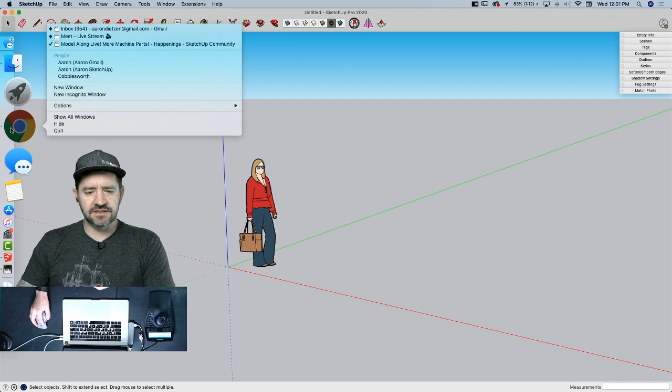We're going to get together today, and two weeks ago we did some modeling of some machine parts. I found some drafting examples online and was requested that we do that again. Last Wednesday we talked about my top 10 utilitarian extensions, a good set for everybody, and that was fun. Today though we're going back to more modeling, kind of a model-along. We're going to go nice and slow, model something step by step, and you guys can model with us. So I've posted up here on the forum six images - I don't know that we'll get to all six, but I found these six images, downloaded them, and we'll use them as parts to model in SketchUp.

So we'll start with this one right here. I believe I called it part A, if you guys did download it.

It's funny because we hang out so often, I feel like I don't ever have as many good stories queued up like I do when we just talk on Friday. Like, what's some good stuff that happened since the day before yesterday? Well, I got ready for this two days ago.

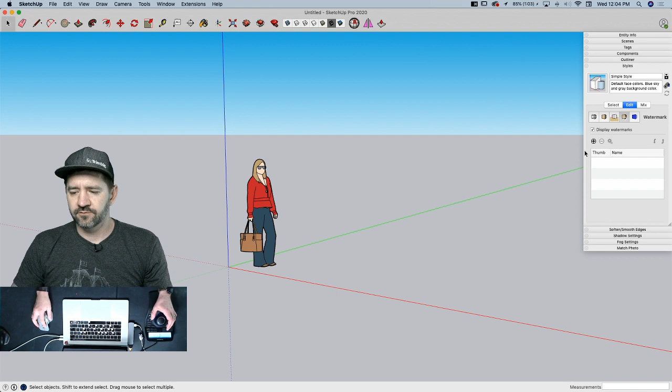I'm gonna go find that first part A, open it. All right, it's gonna bring in all big. I'll actually label this as part A. I want it to be in the background, not over top. Next, full image, you don't need it to be translucent or anything. And I'm gonna position it as I like to do in the upper left corner, and we'll make it small enough that it doesn't get covered up too much by my head. That's pretty good. That looks good. You guys can see that. I can see that. That's the important stuff.

All right, so with that, now we have that image back there. So see, as I move Laura around, any of my stuff is going to be over top of it, and it doesn't move. I don't have to worry about it getting in the way. Second thing I'm going to do is come up to my model info and modify my modeling units. My default template that I generally use is an architectural template, so it's in fractional inches. In this case, though, I want to model everything in even meters. So this is, I assume, millimeters, but to avoid any issues with small faces in SketchUp, I'm going to model everything at meters. So I'm going to come in here, change to decimal

and meters. You change your precision? Yeah, I can change this to smaller. Maybe we'll go, actually everything should be rounded, but we may have some that are like a half meter, so I'll go to 1 decimal point. All right, that looks good. With that, we can start running. All right, like I said, I do have a bunch of these up here, 6 of them, so I'm just gonna hop in and start modeling.

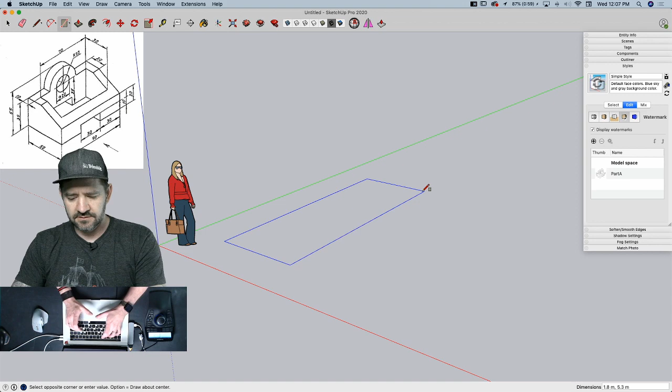So I'm going to start with this 50 by 90 rectangle. So I'm just going to come in here, put in a rectangle that is 50, comma 90. And it's going to be huge. It's going to be big. I'm going to take Laura out of there so I can pretend it's small. I'm going to take that. The sides of this seem to be 10 all the way around. So I'm going to offset this 10, enter, and get rid of this shape. And I'm going to pull it up the full height of 35. That's this shelf right here. So I'm just going to push pull, 35, right, like that.

Now, this little hoopy thing is going to be the last part. I know that's the technical machining name, hoopy part, in case you guys aren't up to date on how all that stuff works. But in a machinist shop, this would be called a hoopy part. That's a lie.

All right, but first I'm going to finish off my block here. So I'm going to start with this right here. I want to get this angle, this cut down. So it has 20 flat, and then it goes to 20 up. This isn't a square, so it's not a 45-degree angle. I don't really care what the angle is. What I'm going to do is just come over here 20. That's going to give me a snap point right at 20. I'm going to do the same thing down here at the bottom and come up 20. And then just draw a line between those 2 points, here to here. Now what I can do is I can just grab that, push it across like that, push that across to here.

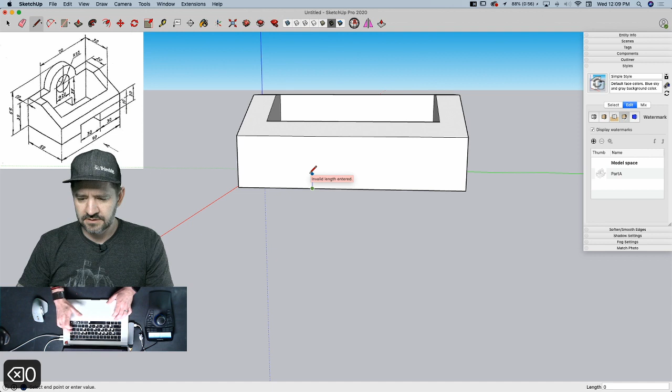The second thing is these little steps right here. Right down here I have a 30 by 10 cutout. So I'm going to start at one end, come across 30, then I'm going to go from that point, there it is, up 10, whoops, up 10, oh, up 10, there we go, third try's a charm, back over 30, and then back down 10.

Now to save myself from having to do that again, I'm going to grab this rectangle right now, grab it from the middle, option copy to the middle of this back wall right here. Now I'll just push both of these through to the back side, there we go. Now I got those cuts.

Did you double click on your second push pull? Yes, I double clicked on my second push pull, which push pulls the exact same amount as last time. So since this one's through 10, this one's through 10, it's the same.

All right, now what we got is our hoopy part. This is the warm-up. This is the easy one. So the center of this circle is up 35 off the bottom. I know that this is 10, so that means it's 25 up from the middle here. So I'm just going to draw a line, 25. Oh, look at that. Look where 25 happens to be. Well, I don't need that line at all then. I can just use the center point of that line. So I'll start right here.

And let's see, we have two circles. One with a radius of 20, one with a diameter of 20. For these models, I'm going to use circles with 48 sides. Just gives me a little bit more clean lines. Not a requirement, but I'm going to do it for mine. So I'm going to do my first circle of 20 radius. That's the bigger circle. Go back to the midpoint and do one at 10.

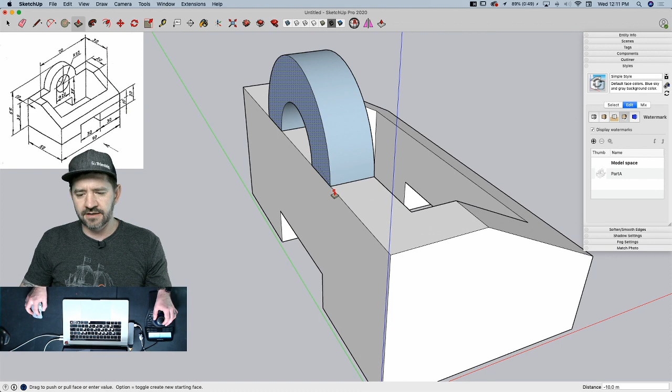And now I can get rid of this line right here. I don't want to get rid of this line yet. First, I want to take this piece, pull it back like this, and see what happened there? Because this was already aligning, it got confused and flipped my inside-outside. Somebody asked about that, and I had to kind of make up an example of what it was. Sometimes you get lucky and you get to make your own problems.

So what I'm going to do instead is, as I start to pull through here, if I hit the modifier key, Option on Mac, Control on Windows, it'll create a brand new surface. So it doesn't have any backsides there. And I can click that to there.

I have to say, in SketchUp, it turns out I'm usually very lucky. All right, that's good to hear. I make my own problems a lot.

So I have this bottom. Right now this doesn't go through, so I'm just going to push pull it through there. There we go. The last thing is modifier key with the eraser to get rid of those pieces. And that finishes our piece.

Under 10 minutes. You should be a machinist. Apparently. I don't know, it probably takes longer to make this out of metal than it does to draw it in SketchUp.

It doesn't quite look the same though, does it? The material looks bigger here or something. Let me try this. Let's go to parallel projection. Go line this thing up over here. Looks pretty good to me. Yeah, I guess so. You might need to change your field of view. Yeah. There we go. Yeah, I guess that is pretty good. Whoever hand drew this was fairly precise.

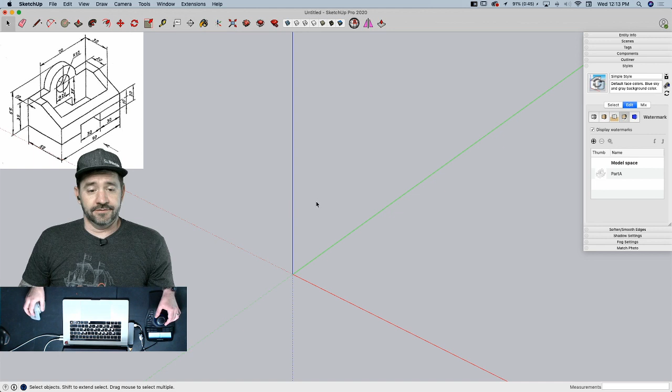I don't know. Oh, Christopher Morin said he did it. Anyone else? Thumbs up, they followed along and got it. Nice. Whoa, Boris is having a glass of wine. I'm assuming it's not noon there. Well, I mean, if it is, hey, no judgment. You do it. Unprecedented times. They're saying it on the news still every 5 minutes. Do what you need to do. Drink wine.

All right, I'm gonna come over here to my watermarks again. So what I could do is I could come here, grab my part B, and open that as a new watermark.

Let's say it's a background image, full image, positioned in the upper left, small enough that it fits behind me. Well, this is going to be exciting. MCAD already tried this, and he stumbled on, I think, the one you're about to do. All right, let's see. I'm ready. Let's do it.

By putting it over top, see that? So now I still have A under there. So if I ever wanted to, I could reorder these and flip through my different parts. I don't know if that has any practical use, but they're in there. That way I don't have to reload them later. You can't hide thumbnail images, so I can't have them loaded and not visible, but I can stack them up like sheets of paper so that I only see the one on top. So that may be something worth doing. I don't know, it's your call.

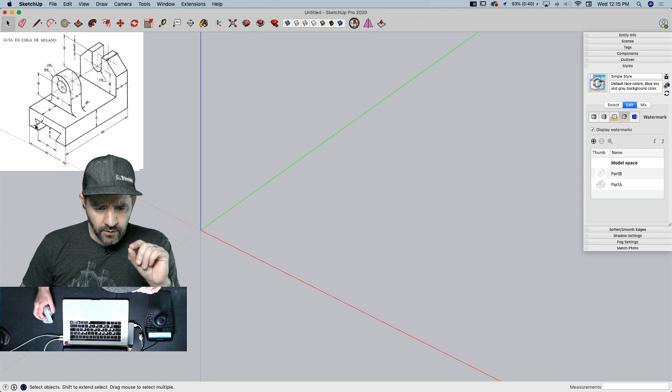So what we have is basically a rectangle where normally last time I started with a rectangle on the ground and brought it up. What I'm inclined to do this time is get this shape first and then pull it this 150 and then build these two pieces up on top. So to do that, I'm going to start with the rectangle here that is 60. And that comes up 25. So there we go. That's this rectangle at the end.

Now, I'm going to draw a couple lines here. So this middle line is 30. Oh, you know what? I can go back to perspective view. There we go. So that means I'm going to come in 15 and draw a line down. Go this way 15, and I'm going to draw a line down. And then I'm going to come here and go up 14 and draw a line across. Now,

what we have right here is a 60-degree angle. See that? It's saying that this comes down 60 degrees. So if one were so inclined and able to do it, they could probably do some math in their head to figure, okay, if this is 60 degrees, what is the angle from here going up? And they could do the math to figure where that is. I am not that someone.

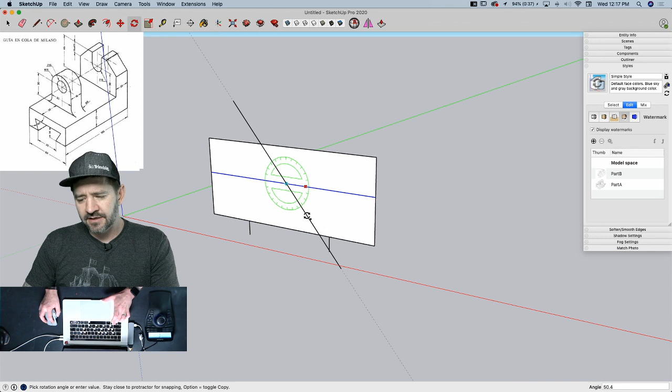What I'm going to do is take this line right here, go to rotate, and grab it from the middle. I'm going to press Option to copy it and rotate it to 60 degrees. And get rid of these pieces above and below, and I can take this line right here and move it to there, to get this one on the other side.

Ilgi is asking why you're not using guidelines. Here's your rant. You can rant right now. Because I don't. I've simplified my rant. Wow, that was fast. No, guidelines are awesome. A lot of people use them. A lot of people really like them. I've just never really gotten into using guidelines. I create the geometry I need and move it where I would need to move it. That's just kind of how I do it. But guidelines are great. That would be one way to do it. Hey, let's look at different ways to do this.

Hey, you know what I haven't done yet? Starts with S and rhymes with save. Pave? Dang it. Pave. I should probably save this. Let's go save this.

Okay, so if I wanted to do that with a reference line, totally could do that. I could come in here and use the protractor tool. I have to go look for it because I'm not even sure where it is. All right, I'm going to go to the midpoint here, and then I'm going to go again to 60 degrees. And then what I could do is grab a line and draw my line right here, inference this line, and then come off.

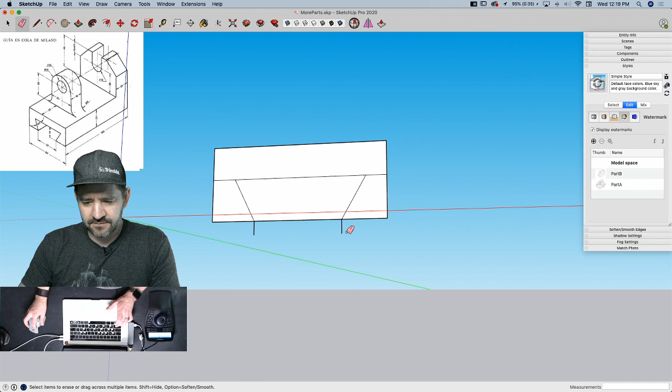All right, now I'll get rid of my extra lines. There we go. So now I have just my piece down there, and now I can push-pull that, my 105. And I have the base right there. All right, two more pieces. Yeah, I don't know what that thing is. I'm going to come draw this one right here, 20. So I'm just going to grab this line and copy it, 20.

What happened there? Something's funny. All right, I'm going to come this way, 20. And then I'm going to push that up 45. All right, now, what does this say? That's a good question. 15 times 45?

So is it moving up 15 units, and it's a 45-degree angle? Is that it, or is it a 15-degree line at 45 degrees? What the hell's a 15-degree line? Sorry. Well, I'm not 100% sure. Well, let me do two things. We'll see. Alexander's asking why I'm drawing in meters rather than millimeters. Okay, so it is a 15 millimeter line at 45 degrees.

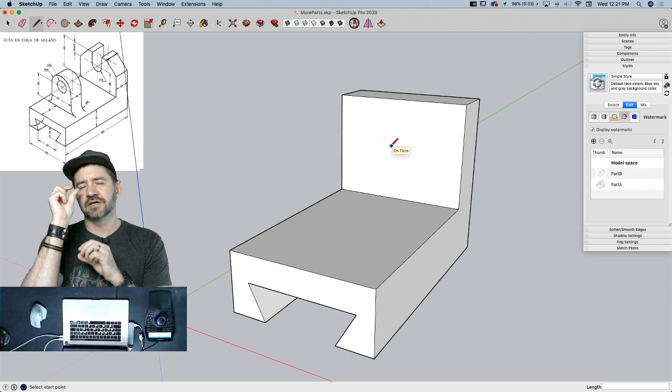Alexander, yeah. I'm drawing in meters because SketchUp is not made to handle sub-millimeter surfaces; it has a hard time drawing or creating those. So I'm drawing in meters instead, so I don't have a problem or an issue with those small faces.

So that's the answer. All right, so here you can see that there is a 30 unit, 30 millimeter, 30 whatever, going up to the center of that circle, which also lines up at the bottom edge of that angle. So since it's all 45, you can deduce that the last part is 15. I'm sorry, that's math. I'm mathing that part. I'll shut up. Okay, so here's the two things that I was thinking.

One is it's down 15, right? And then I'll draw a line like that. And I can take that, and I could rotate that 45 degrees. That would be an option. Likewise, I could also say 45, 45, and connect the two.

If it was a 15-meter line at 45 degrees, what I could do is draw a line that was 15. I could take that line, rotate it 45 degrees, move it against one edge, and then move it by the top up to the top edge. So I could do that. Either of those would be right. But I think, like Jody's saying, when I do that and look at the image, this looks right.

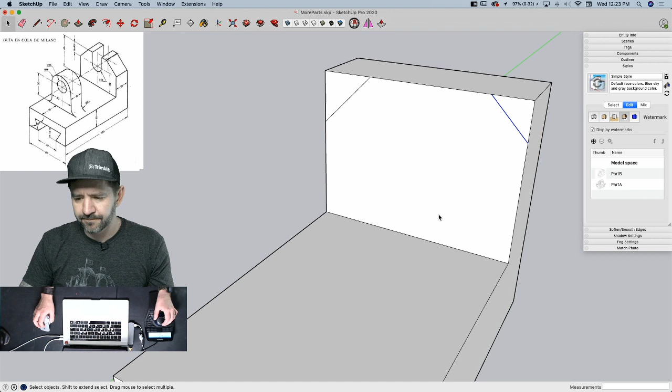You can see a line that goes across the bottom edge, goes all the way across, and then there's a 30. It's kind of written on the inside of the dimensions. You know that the bottom of that angle is 30 up. Right. Yeah, it's 30 up. So let's start here. Let's go to the middle, and we're going to come up 30. Grab a circle.

Radius of 15. What's the diameter of that? Nope. No. It doesn't say. Now I got to go look at the picture. No, I think it's a diameter of 15. So 7.5. Okay. That's light math, guys. That doesn't count, by the way, as being math, dividing by 2.

So then I'm going to go straight across. So see, I'm staying on the red axis till it hits the circle. That's important because I want to make sure that I stay on axis with that. Also, whenever I draw a circle, I'm always snapping out to the red, blue, or green axes, always keeping one of the edges on axes.

Since I have 48 sides, that means it's going to put 12 sides between the axes. So as long as I always stay that way, then I know I have snap points at any of those corners straight across the axes from the center. All right, so having done all of this, I can get rid of this. I can pull this back like this. And now if I look at my two options here, yeah, I'd say this is probably what it was.

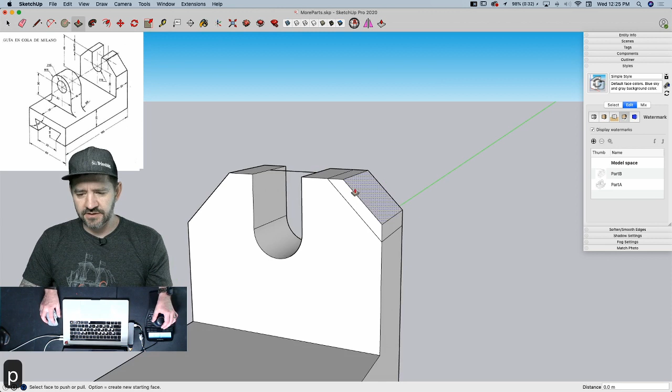So here's what I'm going to do. This will be fun. I'm going to draw a line right across the middle here, this piece. Grab this surface, go to rotate, go in the middle, option, swing that around 180 degrees. And then that material, that merges right there, so I can just push, pull, and cut that off. Bing. All right, I'm going to modifier erase there.

Okay, I'd say we're doing pretty good. Looking all right. Now I got one more thing up here. It's got a hoopy part on it.

Hey, Dave, welcome back. Isn't a hoopy like a kind of a car, like a janky old car? I'm sure. That's a hoopty. Yeah, hoopties have hoopies. Okay.

All right, so I'm going to come back 25.

I should stop drinking wine for these. Hey, you're an employee. You can't say things like that. I'm just kidding. All right. It's now on my official record. That's right. It's been recorded.

I'm going to draw a line from here. I'm going to go up 30. All right, now I got two circles. I'm going to draw them constrained to green using the arrow key. I'm going to hit the left arrow key to constrain to the green axes and pull down. Just like I was saying before, I want to stay on axis, so I'm going to pull down vertically 7.5. And then again, pull down on the vertical 15. That gets me this inside and outside circle.

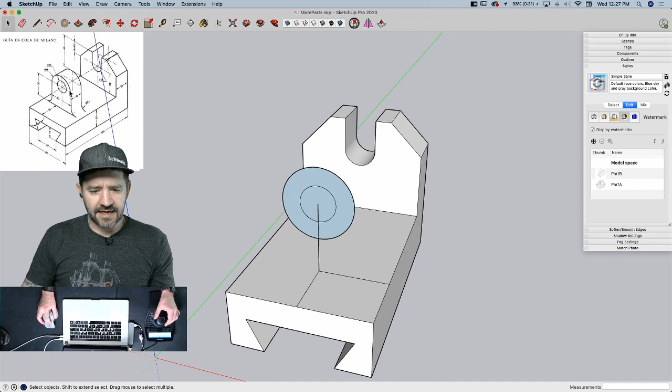Again, I can come straight across like this. That gives me the vertical. I'm going to drop that all the way down to the surface. Come across here. I'm realizing at this point this is a symmetrical piece, so I could have modeled half of it, but with all the circles and stuff, I don't know that I'm saving a whole lot of time on modeling half and then copying it over. I guess if you're counting clicks, then I'm spending extra time, but wait. All right, so... No judgment.

This is 30 wide, and now I have here a little arc with a radius of 6. So I'm going to draw a line up 6, and then take an arc from that point. Same thing here. 6, and now I can put an arc between this point and this point. Again, to save time, I'll just grab this one, go to rotate, because I have this middle point right here. Rotate from here, bring it around the other side, click.

Now I can erase this, and this, and I can pull that, looks like 15, enter. All right, and then I have a little bit of softening to do, so modifier key with my erase. Oops, it didn't merge right here, so I'm going to draw a line right here. There we go. Now it merged in.

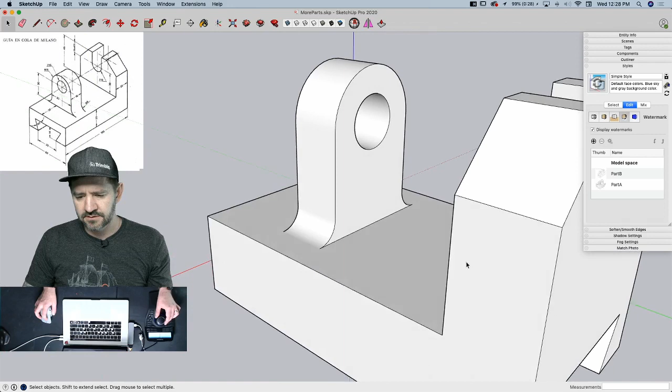Perfect. Manos is asking to show again how you move the direction of the circle. Arrow key. So when you come into, I had a line like this when I go to my circle, and I hovered over a point. The arrow key will let you constrain. So before you click, I haven't clicked on the point yet. I'm just hovering my mouse around. I can hit the arrow keys to switch which axes I want to draw on.

All right, time to save again. Let's save.

Are you doing the sip and save? It was pointed out earlier, I forgot who said it, you're supposed to be drinking water too. Stay hydrated. And I got a cup that doesn't disappear. It doesn't blend in with the green screen like the last one. That was just a little too crazy.

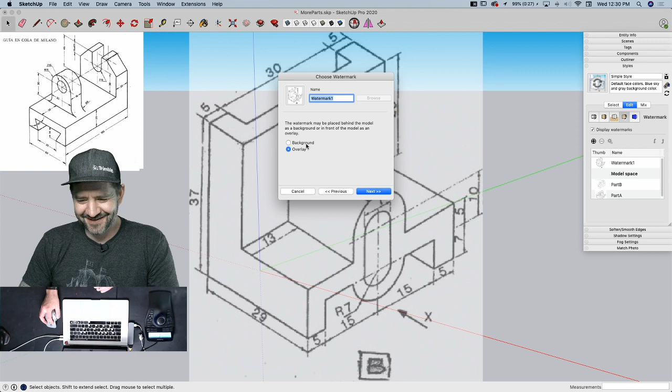All right, time for a new image. Come back to my watermarks. Hit plus, and now let's move on to C. It's kind of killing me that you don't have it sorted alphabetically. So yeah, I know they're all out. The click that it would take to fix that is just one click too many, apparently. I'll get through it, I guess. Maybe I'll resize it next time.

Cowboy asked earlier for you to do a spiral screw. Now he's asking for gears, which might be a little too late for this one, but maybe on the next one of these, you can kind of start to get into that.

Absolutely. All right, so I don't know why I was trying to pile these up and keep them all, but you can see it's starting to become an issue because they're not the same size. So I'm just going to go ahead and remove my old ones. I don't actually need these.

All right. I'm going to have to make some assumptions on this one because we only have this viewable from one side. I'm going to assume that this channel continues through, so it's open on the back. I'm also going to assume that it runs up to the back of this wall and then stops. Those are my assumptions for this design, and I think those are both good.

This has got lots of weird, odd numbers - 37, 25. Don't you know you're supposed to be divisible by 10 on something like this? Gosh, it's metric. I thought that's the whole point of metric.

So to touch on this real quick, Cowboy asked about gears and screws. Absolutely, both of those can be modeled using just native tools the way we're doing it right now. But there are extensions that make it easier. With screws, it's easier to use something like Draw Whorl - WHORL, I think is the name of the extension. It will draw screw patterns, spirals, things like that. I think there's a couple screw extensions out there. They're just time consuming to draw with native tools.

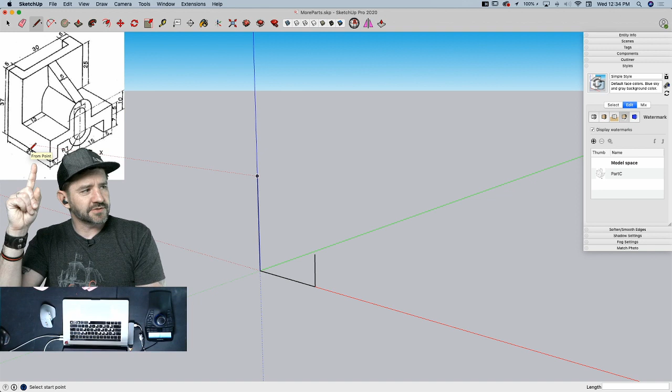Wait, 29? Where are you measuring there? 12, right across the bottom, so I'm drawing it like this, like it's actually showing up here. Where'd you get 29 from? Right here. I'm not looking at what you're looking at, I'm looking at the picture. I'm sorry, right above my head. Oh, I see you, I don't see your head. Oh, that's right.

Bring this like this. Yeah, they don't give me this dimension right here anywhere. I can assume that it's the same 12 as it is here, because there's no other dimensions horizontally, so I'll have to assume it's the same dimension. So come across 12 and then take that down, then I have that piece, which can then be...

Uh-oh, my stuff is getting scooted down some more. I told you, throw it in a bin. I should have tagged it and made it invisible - that would have been the smart thing to do.

All right, I'm gonna take that and push it across 5. Now I'm gonna save myself some time later on - I'm gonna grab that and move it. 30 plus 5 is 35. Nice math, good job. Okay, I did a little math, I cheated. All right, and now I'm gonna come down 5, draw a line like that, come across.

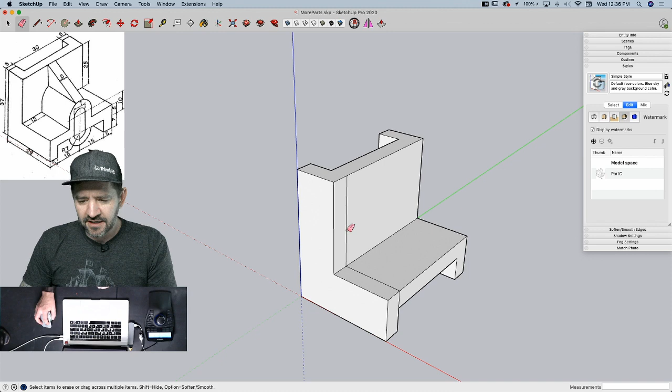So I guess this is a third assumption you have to make - the depth of that piece. Yeah, I was looking for ways to work backwards into this, but there's literally no dimensions on this plane, on my red plane. This is the only dimension - see that? So there's literally nothing telling what that is. But, like I said, assuming based on my assumptions that this channel was consistent around the backside, I think we're okay.

Because we have to be. We have to be okay. I declare it as okay. All right, you know what is okay? Oklahoma. Okay.

Yeah, I know. I mathed it, Brent. I mathed it, I'm sorry.

Miguel is asking about the black thing - this is a 3D mouse, used for moving in 3D space. It's not a requirement to use SketchUp, but I use it because it makes for a nice presentation, nice smooth zooming. All zooming can be done using just the middle mouse button: scroll to zoom in and out, click and hold to orbit. Everything can be done with just the mouse. If you're a designer who does a lot of 3D work, it's worth checking out because it's a very nice way to move in 3D.

All right, almost like I've said that before. Anybody catch that? Time or two.

I'm gonna go grab another circle. I'm gonna come on the red axis right here and say I have a radius of 7. So come here and pull across 7.

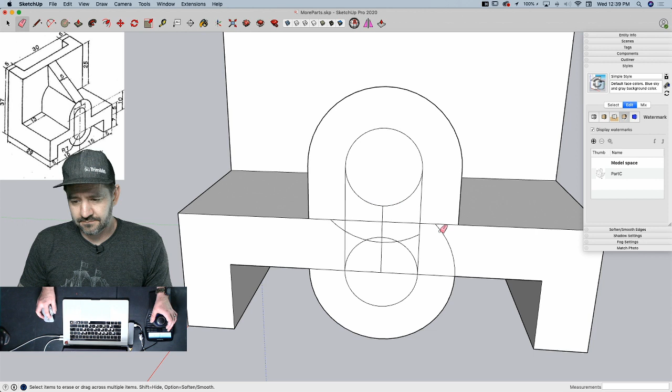You know, I find that I'm not having a lot to contribute value-wise here, and I just want to make puns about you using the Marine motto for how you model. Simplify. Oh. Yeah, I'm sorry.

Okay, well a couple deep breaths, serenity there now. All right, that's what I need. I do need all these 3 pieces.

This one right here is going to pull straight back - modifier key to hold onto my face there. This one's going to come through and stop at the face here. This one is going to go all the way through - actually it's going to stop me right here. That's fine, because then I can actually do this, and I can take this and pull that through to the other side like that.

Sure does create a lot of messy geometry you got to clean up. It does. And this is maybe where guidelines - notice I said maybe, I'm refusing to commit to it - but this might be a spot where guidelines would save me a little cleanup. Also I could use something like the cleanup extension, soften and smooth, which I'm not doing. Maybe next time we'll use the cleanup extension and get all that cleaned up for free.

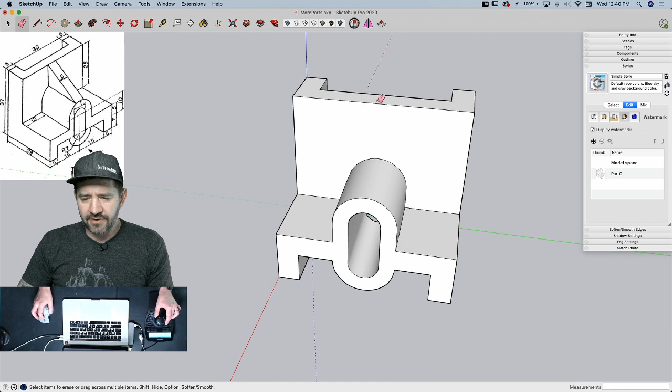All right, last thing is a 5-meter ramp coming from here down the front. So this one's frustrating, Mr. Morin. Well, there's an issue here, right? Because...

That is the angle that this would go from the very center down to here. Once I come over this way, 2.5, and I go parallel to that, that's where it hits the surface.

So yeah, I think I would draw lines straight down and just wait. Yeah, pull it out and then cut it. Right, well that's the question - something has to happen. It's not going to tie up all nice and tidy like this. This, this - this is what lying looks like.

So yeah, I can go straight across like that, drop this straight down, drop this straight down. Then I can pull from that corner straight back - let's go constrain to red. Take that straight up. Whoops, missed it by that much. There we go.

Same thing over here. Start right here, straight back on the red.

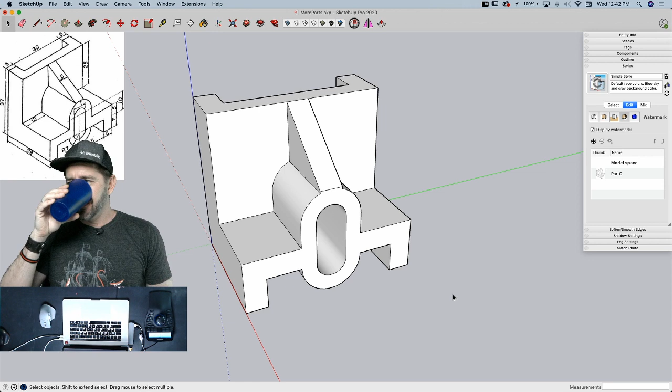Yeah, I've done a little bit of design on architectural drawings that maybe didn't actually work in the real world.

All right, so there's my part 3 in the books. Maybe take a second here since we're at the halftime show, you can see if everything makes sense so far. How's everybody doing? Is everybody following along? Sometimes I just get rolling and I just got to keep drawing. If you keep this up, we're gonna be done by 1:15. That's right, I got to stall for a little bit.

Time's 1:30 anyway, stretch. I know a question came across about 3D mice. Like I said, not a requirement, but I like it a lot.

I find there's two things for me. One is the smoothness that I can show something in, walking somebody through a model with these nice gliding movements. This is great, definitely an upside to it.

The other thing that's nice about a 3D mouse is it frees up this hand. This hand does all the zooming while this hand does all the work. So I can be looking around, I can pan over to that other one and paint it. While I'm panning, I can go grab my paint bucket and have it ready by the time I get there. So as a presentation tool it looks nicer, but as a process tool or design tool, it definitely speeds up the work. So yeah, I think they're great, I'm an advocate for them.

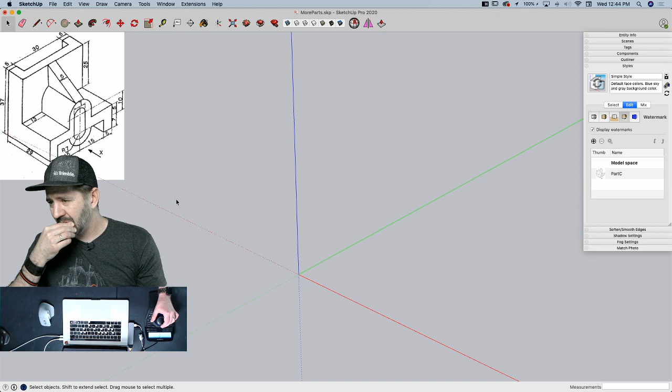I think Cowboy has a good question worth exploring: how would you do this drawing we just did if you were to actually bring the edges down instead of there being a blunt tip on the point? Sure.

We can't have it both ways, something has to change in that case. What I could do is come in here, take this surface, and move a copy of it straight down. So that would be one of the options, like that.

The other option, since it didn't actually specify that angle as being important, I could take that point and bring it up here, and have that as an option as well.

But with this being a smooth surface, it can't be flat on this end and follow an arc on this end. I could do something like a loft to stay flat at the top and then come down to a curve on the bottom, but I can't see a machinist doing that to create this piece. More likely this would happen, since there's really not a purpose to hold on to that arc right there. This would probably make more sense, but I'm not really sure what the preferred method would be - either of those would work.

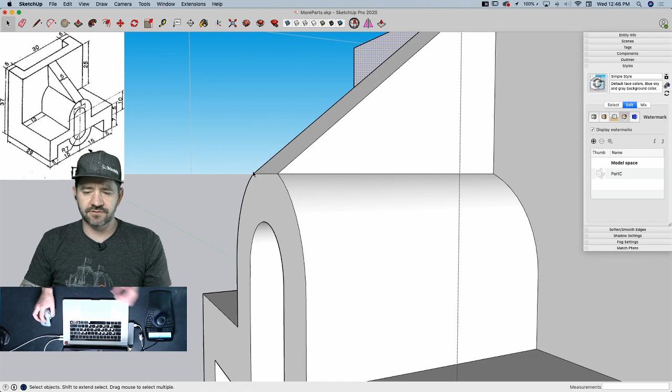That's right, I think those are both good. It's unfortunate, but it's logical - here I have an arc, here it's flat. I can't take a flat surface and be flat on one end and arced on the other. That's not possible, it would have to at some point break into an arc shape. So if I needed to maintain this curve right here, I would end up lofting that together.

Cowboy asks, since you described it that way, if you left the radius in place, it can't intersect. Right, so let's back it up - let me put that arc back on here real quick. So that's my arc, and this is that plane coming down. It either has to stop above the arc or cut down into the arc, but I can't actually follow both with a straight face right here. That's what I'm saying, that geometry can't exist.

You can't do this with a straight face. Gotcha. So it's one or the other - you can either have this edge above the arc, or it can bite down into the arc, but it can't follow the arc and have a flat surface here. It's just the way our reality works. All right, so okay, either of those would work.

Patrick's asking about the modifier key. When you're in push-pull, it is Option on Mac, and I believe, I'm 90% sure, it's Control on Windows.

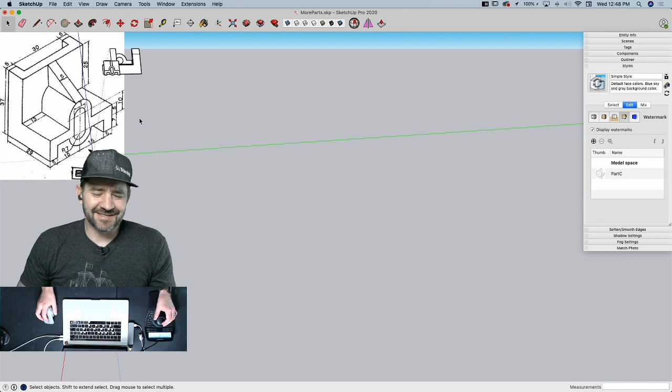Well, that's the thing. I mean, we used to talk about this, like I said, in architectural design. Roof design is horrendous for this because you draw a roof from above and everything is these nice 45 degrees and everything lines up. But when you actually create a roof, they're all sloping surfaces, and if they're not the exact same slope, they don't meet at 45s. They meet at other angles. So you can draw on a piece of paper nice 45s and say this is a 6/12 and this is a 10/12, and just show them meeting at the same angle, but that doesn't actually happen.

So yeah, drawing something like this and then actually creating it in 3D space are two different things. You can do some stuff with pencil drawings that you just can't do with a 3D modeling tool.

It's superior in all ways. Why is anybody even using computers at this point? You can't BS the same way in real life.

There we go. Sorted alphabetically, Jody. Yay! So much better. Let's open D. Moving on. Put in background. Oops, that was the right one. Just wrong button. And let's shrink it up. All right, my head may clip it a little bit, but I actually gotta go a little bit bigger. I'm sorry. I'll try to dodge my head when I'm pulling dimensions off of here.

I was wondering why you use Mac over Windows if you have a preference. Honestly, SketchUp runs on Mac or Windows, so get the kind for the computer you have. It is totally a personal preference that I myself like Macs better, and I have reasons for that, but now's not the time or place. This is not the platform. I like Macs just personally, but yeah, whatever kind you want, SketchUp runs on both. I'm not running a Mac because I'm running SketchUp. I am running SketchUp and I have a Mac. Yes, it's not either or. Nope. Or maybe it is.

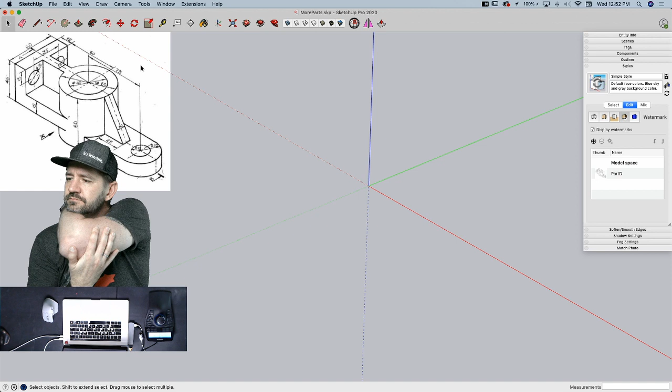If you come back on Friday, chances are pretty good that's exactly what you'll do, right? What am I doing on Friday? Fridays are the day. Friday's the day when Aaron only models half a thing and then flips it. That's right. At least historically. That's why they're 2 to 3 hours instead of 4 to 6. All right. Oh, so he actually spelled it out. Santiago Chinas. All right. Well, now I will try to remember that that is Santiago.

Okay. And there's another question there. What was the other one? Oh, Cowboy just wanted to know if you should be using a GPU. If you've got a computer with an actual 3D accelerated video card, definitely use a 3D accelerated video card. Right. Use your big computer, not your little computer when using SketchUp. That's right. Put as much on the GPU as you can.

All right. With this, here's how I think I would approach this. This centerpiece is calling to me, so I think I'll start by drawing this on the ground and then this shape on the ground and start bringing it up. Oh, this piece I'll add after. Yeah. And then this piece I'll probably intersect when I get part way up. So I'm going to start with that.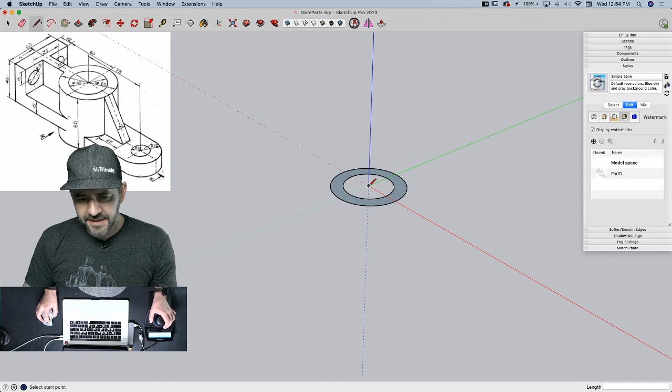I'm going to start on the ground. I'm going to draw this first circle, which has a diameter of 40, so I'm going to draw 20. And then the next one has a diameter of 60, so I'm going to draw a radius of 30. So that's this circle right here on the ground, the bottom. And then from that center point, I have over 75 this way. I have a circle with a radius of 10, and then a radius of 25. So I'm going to draw those.

Again, staying on axes to draw my circle. 10, 25. Get rid of this. And then, again, I'm going to draw my reference lines on the green axes just to make sure I get the right spots. Take that straight back. A lot of times I'll do this, rather than trying to snap to the face and stay on axes, I'll just run my line through on axes like this. So I'm staying on red and overlapping, because it's easier for me to come over here and delete these than have to worry about snapping right against that angled line and zooming in real far to do it.

All right, I'm going to do this, and get rid of this. So I'm intentionally leaving this as two separate pieces because one of them comes up 15, the other goes up 60. So I'm going to intentionally keep these separate. They'll still merge together on the ground underneath afterwards, but right now I'm going to pull this one up 15, and I'm going to take this one up 15 as well right now. I clicked on a single face and hit orient faces. That put all the faces facing the same way because part of that was upside down.

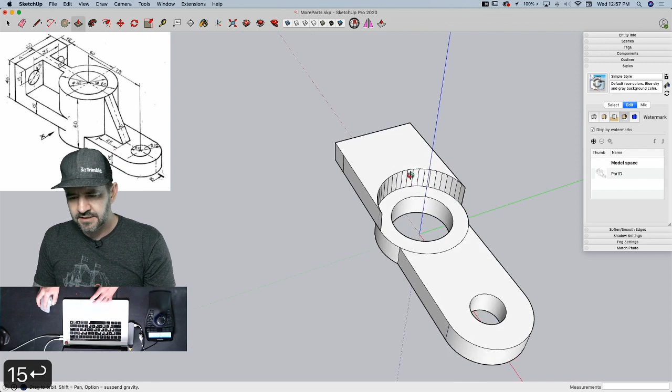All right. As I pull this up, I was going to pull this up 15, but I saw that somehow, at some point, I broke my circle. See this? So I have separate pieces here. I don't want to do that. So I'm going to come in here, double click on this face, then turn off this face, turn off these lines. So I have just this arc selected, and I'm going to go into extension and hit weld. And now when I pull it up, see I get that nice smooth face. I could have modifier erased that as well, but I didn't. Just showing how you can fix that beforehand.

All right, and now I'm going to take this line and pull that up an additional 30. Now I can grab this circle right here and I can pull it all the way up to here. I'm going to go ahead and get my modifier key, Alt or Control, depending on your operating system, and get rid of all these extra lines. I could come in here, by the way, I could grab all of this and use Soften and Smooth. So I could just turn that on and then play with this to get rid of the pieces I want.

It kind of falls in line with maybe this is the equivalent of, ooh, look at that, of hand stitching, but I just kind of like smoothing those lines out. Oops, that line wasn't supposed to be smoothed out though. That's supposed to be there. Yeah, I tend to do that too. There's something rewarding about it. Yeah. All right, so at the bottom, something I did prevented that from closing up. So I got to get that cleaned up. I can take these faces out of the inside. That's optional too. That's just to make it a solid, which is something I try to do.

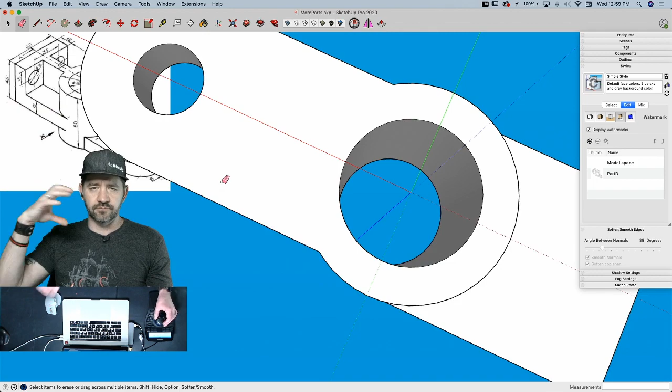That was actually pretty easy, but what you can do to do this all in one move is if you take a line and connect it from the outside to the inside, if I do that twice, sometimes it'll just close the whole donut. So that's an option too. If you don't want to have to break each circle, just connect the donut.

Donut. All right. Hey, if I look at it like this, it looks kind of like a toilet bowl. I thought I looked away and I looked back. I'm like, when did we do toilets? I just machined a mini toilet bowl. Not mini. That thing's huge. You could fall right in.

All right, so right here, I have this little piece 10 wide at the middle. So what I'm going to do is I'm going to come down here on the flat. This is the flat piece between the two. I'm going to go find my midpoint. I'm going to draw a line this way, 5. And I'm going to drop that line straight on the red axis till it hits, and then come right here, come back 10.

JDC said you need some TP to go with it, and I just want to make it clear that we are not hoarding TP around here. That's right. So if possible, we don't have that to spare. That's right. Or maybe it's too valuable to joke about too soon. Maybe now is the time to do that. Maybe we should be modeling it since we can't actually have it.

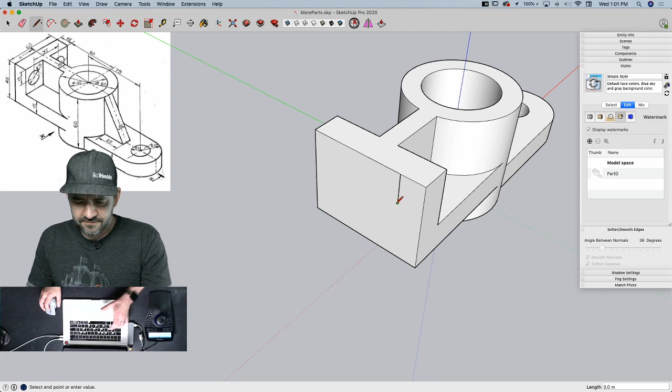Oh, okay, fine. All right, so now, let me do the other easy part. Right here, we have, this is such a weird way to dimension this. I'm going to come around this side. So from this middle point, 17.5 over, 15 down, I have a circle with a radius of 8. I'll push that through the other side.

So where did you get this? Did you go to confusingmachinedrawings.com to download all these pictures?

impossibletobuild.com. All right, what I'm going to do right here, to get this circle over here, rather than doing that same thing I did on the back side, I'm just going to grab it by this corner, modifier key move to drop it over here. It'll do that sometimes. I'm just going to close it, and then I can push that through to the other side.

All right, getting there. Now, we're going to have the same issue with this ramp, but it's worse. Because what I have here, so let me start by finding, where's the front? Okay, so this right here is the middle. I'm going to draw a line down so I can keep track of that. So what's happening here is I have a measurement back from the end of this ramp. I don't know if this, it's like a reinforcing piece. I don't know if it's actually called a ramp. Not having terminology's never stopped me in the past, though. It's saying it's forward 25 from this piece right here, but we all know we're coming off of a curve right here, right? So if I come over 5,

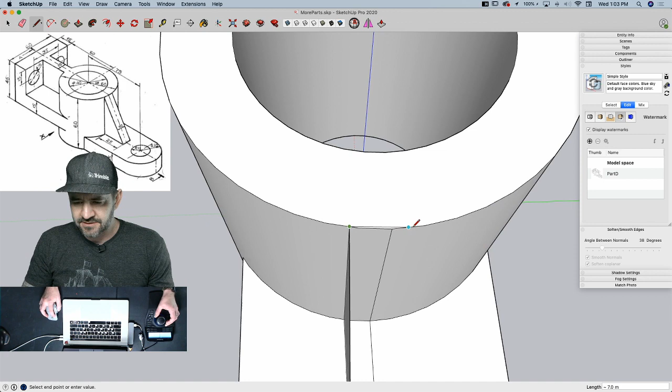Yeah. 25. I can bring that over like that. So that then is 25 off of here, which actually ends up only being about 24 and a half from the middle. Now we get back to the same question we had before, right? Do we just take this straight across like that and cut that corner off? Because then I can take this, option copy that over here, get rid of all this mess. Yeah. I get rid of too much. That's because that line's not closed yet. Yeah.

Merck said it's a gusset. Now I gotta ask the Google the difference between the two, buttress and gusset. 2 S's. Oh, sorry.

You know, I've heard sometimes if you don't keep those buttresses properly welded down, they can fly right off. A buttress is an architectural structure. A gusset is how I would have used it, because in the Jeep world, whenever you put on bigger tires, you need to gusset your axle to make sure that it doesn't. I'm geeking out in the wrong direction, though, right? It's still metal. I think in the mechanical world, it's a gusset, and a buttress is for architecture. Sounds good. Is gusset sort of an indifferent term you just use for reinforcement? That's how I use it.

Marconi's asking about welding. You know, actually, I think I'm going to do a skill builder on modeling welds, because enough people have asked about that. Yeah, it seems like one that's a little... I mean, it's a neat detail, but maybe adds complexity to your drawing that defeats the elegance of SketchUp. Yeah, I think there's a thing with putting a weld in with enough detail that it shows what it is without making it super heavy. Because I've seen some people who put in weld drawings that end up being hundreds of thousands of faces on a couple inches. That's not so hot.

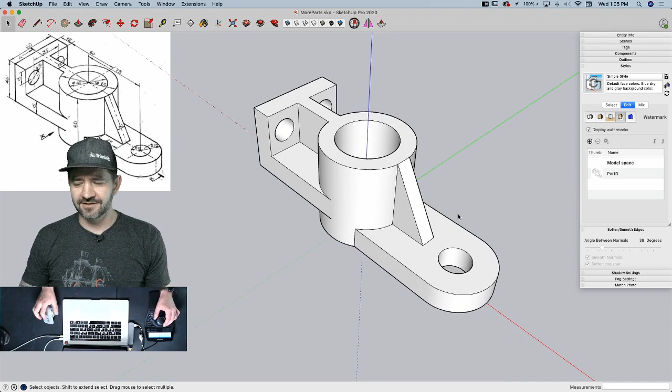Oh! There you go. Andy on Twitch caught me. Good call. All right, I'm going to make that a new group. It looks good. It's going to look gigantic when you slide it over there next to the rest of them. Yeah, this is a big one. Actually, no, the third one's just tiny. That one's tiny. This looks like it fits. These three could hang out. This guy's a precision part. Yeah, it's tiny too. Not only is it a weird one to have to machine, but it's also little. All right.

Are they all solid? You didn't do a solid check on any of them. I was just thinking about that. Let's just check. Solid, solid, troublemaker, solid. Hey, that one's not solid because it's so small. Come on, little guy. Play along with your big brothers here. Let's check and see what's going on. Got a stray edge and an internal face. I'll just let Solid Inspector fix them all.

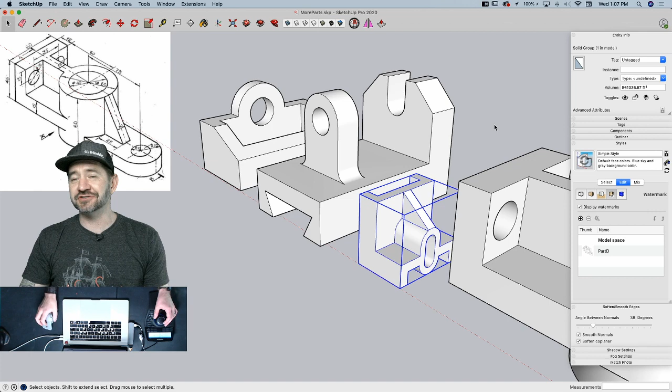Nur is watching on YouTube from Indonesia, where it is currently 2 in the morning. 2 in the morning last night or tomorrow morning? He's saying it's tomorrow afternoon. I'm confused. I don't understand international time. I'll just be honest, I don't. I get we have to arbitrarily say something is a day or a night, but how it can be, I don't know. I can't even. I always want to ask people in the future if they could go find out what the lottery numbers are for me tomorrow. Yeah. Or tell us if something bad happens on a certain day so we can fix it. Yeah.

Eric was pointing out that you can also use X-ray to see interior edges and delete them. Absolutely true. This is a great way to do it. All right, 4 out of 6 down. We're flying through these things. This next one is tiny and hard to read. Is it small again? Well, the actual image is small. No, it's big. It's like 110 wide, it looks like. Ooh. All right. Well, let's come in here, delete this part, and load a new watermark part.

It's 1 o'clock in East Amherst. We're on to afternoon here if you're following along.

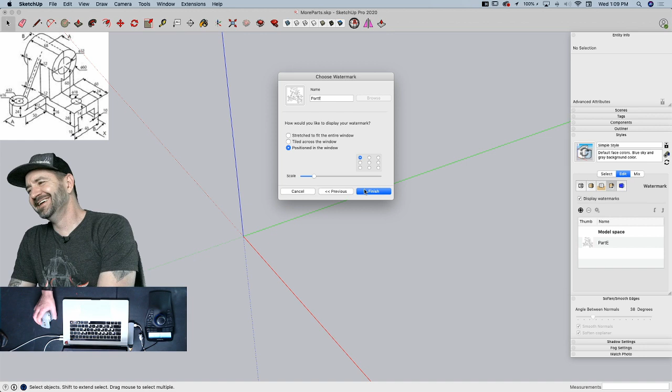It looks like Dave already pushed his version of all these up. Well, at least he waited. Because last week, I think he had them posted the day before I put the initial post up. I'm just kidding, Dave. It's fine. It's hard not to.

I mean, this is gonna sound super geeky and nerdy right now, but that's okay. This is so much fun for a SketchUp user, where there's an absolute right way to do it. It's precision modeling. It is an awesome way to just practice. So it's kind of funny, I think Dave geeked out the same way I did when I first found a website that had, I don't know, 36 files like this of small drawings. It's good times.

All right. Oh, Brent. Looks like Brent pushed his SketchUp file up. Let me pull that up. Nice. All right. So here again, my initial thought would be to create this shape right here and push it back. Oh yeah, so I have the full dimension, 60 plus 68. So I think that's what I would do.

I'll come over here, I'll go up 28, come across 60, back down 28, over 10, up 14, same thing over here, 10, 14, and connect the two together. Now this comes back 60. And then it's 68 minus 8, so it's 120.

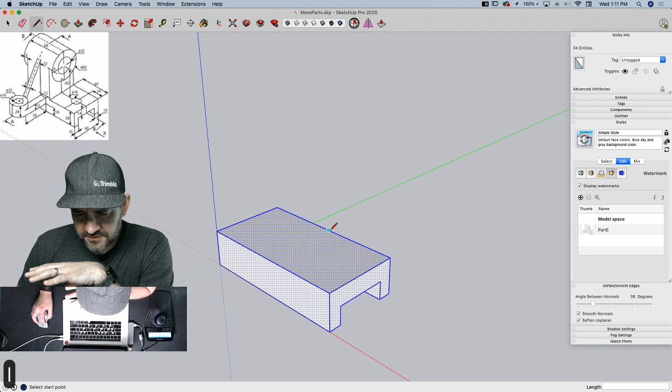All right, that's the easy part. Now we got some stuff happening right here at 60 back. So that's right in the middle. So I'm going to draw a line across like this. And I'm going to pull that up 60 according to this dimension right here. That goes 60 to here, which is the middle, and that's a circle of 60, so that's all good. I'm going to start right here. I'm going to pull that first circle out, which is 60, and just to keep this going, I'm going to pull it across right now.

I'm leaving this because it's going to get pulled out also. Pulled that this way, 8. And it also sticks out 8 on the other side. So I'm going to grab this circle right here, from this point, Option copy, and stick it on the back side. And then I can just pull that out 8 as well. And now I can put this middle circle, go to this point here, and it is half of 32, so 16, and I'll push that all the way through. All right. Use my modifier key to get rid of these extra lines.

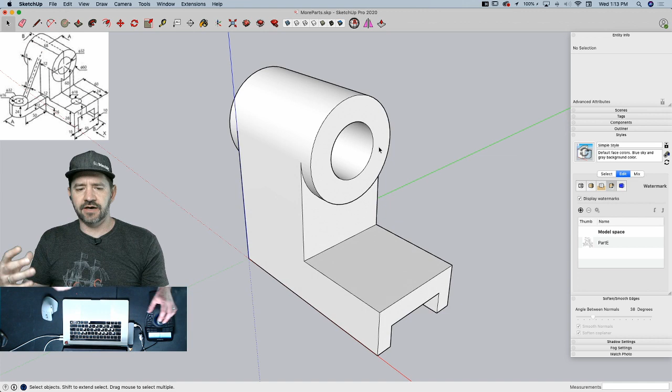Really, there's nothing on here that's terribly complicated. I think after you've done this for a little while, what really becomes easier is breaking down how to model the shapes. And I think that is the experience of designing over time, that you look at something and you start thinking immediately, how would I break that down and how would I make it? Everything I've done so far, there's really no complicated steps. I haven't used any crazy extensions or modifier keys that aren't just standard tools.

Everything's pretty basic. I think the big thing, like I said, is getting used to how to break something down. And I think that's just design experience, and that's one of the things that practicing by drawing these machine parts really helps you with, is how to break everything down like that.

All right, so I have one screw hole, bolt hole, whatever, some kind of hole here, 24 back. So I'm putting another circle right here. Probably just call it a hole. I don't think anybody's going to challenge you on that. It is just a hole, yes. I'll pull that through the other side. All right, so that's most of that. Let's save real quick. Now we got this little thing right here. This looks simple enough.

I'm just looking for a dimension. So I have a 22 right here. I'm trying to tell where that is. If that comes back from here, is this whole thing centered? I really don't know. 8 plus 12, so if it's 12 on both sides, that's 24, so that's 32. All right, so you can use that center line and then the diameter for that circle too. Yeah, I'm going to draw it centered, and then maybe I might end up moving it.

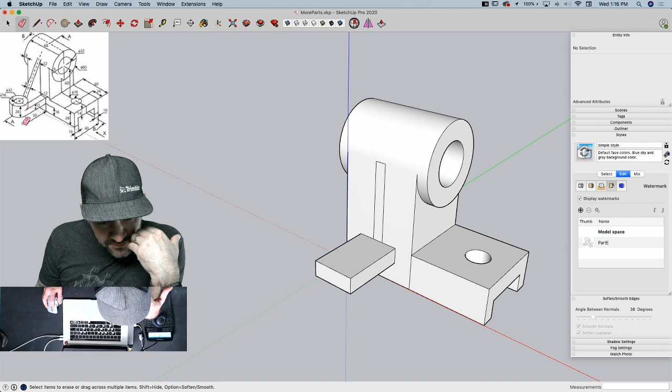I'm laying track down to drive on later. Now I'm going to pull this out 50, and I have to make some assumptions here. I'm assuming that dimension is on the side, so that is the edge. I'm going to draw a circle right here, that should be 16, then pull it down. Draw one more, 8. Then get rid of this and pull this to the other side.

Modifier key erase to get rid of these 2 lines. And then, oops, I deleted that. I shouldn't have deleted that. Sorry, I feel like that's my fault. Yeah, I'll let you take the blame for that. I need to pull that up an extra 12.

All right, and now I have this reference right here. That's funny. Is Dave and Christopher caught this?

I'm hearing you like 10 seconds faster than them, but they both totally caught it when you did it. Put that arc back. Put that, you need that circle. Thanks, guys. Stop it! No.

Okay, so now I'm going to bring a line back here. Let me get above here so I can see straight down. There we go. So I run into the line there.

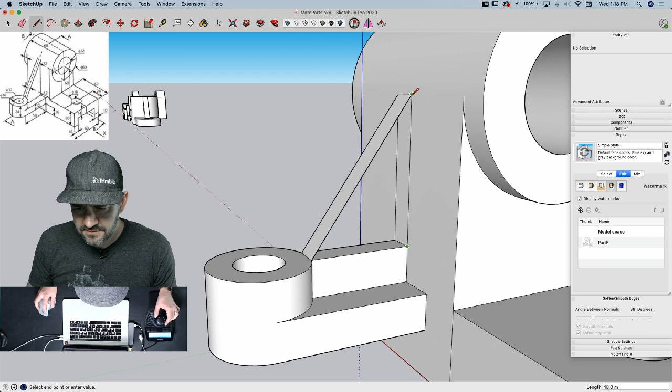And now, I guess I could just pull this up, do a push-pull like that. So I could right now do this, this, and this. Hmm, I thought I could, apparently I can't. Stitch it, stitch it. Oh, I missed it. No, wrong endpoint, I got everything wrong there. All right, let's try that again.

We're gonna have the opposite - this is gonna be the opposite of the issue we had before, because we're gonna have to intrude on a circle rather than cut it off. So that could happen. It looks like this goes above that though. I wonder if this is like a going to tangent kind of thing.

Marconi says he has more. Yeah, throw them in the forum. That'll be a fun thing to do on a cold quarantine night. Oops. Or warm, since it's getting warmer.

All right, so I'm kind of thinking. Nope, I missed it. I don't know, I'm just playing with something right now because I hadn't really had this thought out. So this could work, this could be good right here, but it kind of looks like that goes up onto the circle a little bit.

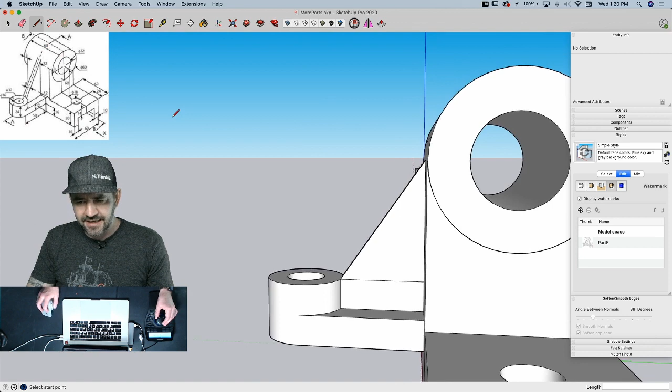I think this line here is indicating that maybe it goes to tangent or something like that. So here's what I'm gonna do. I'm gonna grab this circle and take this circle and make a copy of it and bring it back here.

Because what I'm curious about is which one of these segments - see, that looks pretty good. I like the way that dies in there. I can take that then and I can push pull that to the other side. Yeah, I like that, that looks nice. See how that dies right into the side of the circle rather than kind of just sticking in the side of the piece. That looks much better.

All right, so at this point I really just got cleanup to do. This is the same issue here, by the way - this is what we were talking about before. I guess there's another option, because what I could do, again thinking about actually machining this, if I was to do something like this.

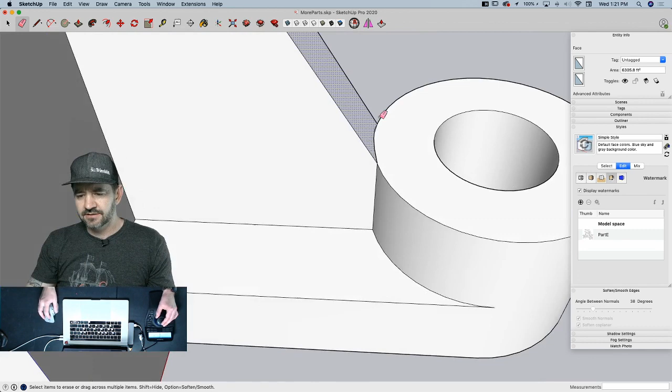Vitali's asking if there's a way to type in a value for a push-pull. Yes. As soon as you start a push-pull, the way it should work is you click once to select the surface, you start to move, then you type in the exact dimension and hit enter. That's how a push-pull should work. We get in this habit, especially for some reason it's worse with push-pull than others, where we click and drag and try to release where we want it to go. But the general way to use almost all the tools in SketchUp is to click and release, then move your mouse where you want it and click and release again. Clicking and holding and dragging just sets you up for problems in the future. So yeah, just click release, start to move, type in dimension, enter.

Yeah, so that was the other way this could go then, basically what we had before. I'll take that to there. I'm drawing a straight line here. Get rid of all this stuff.

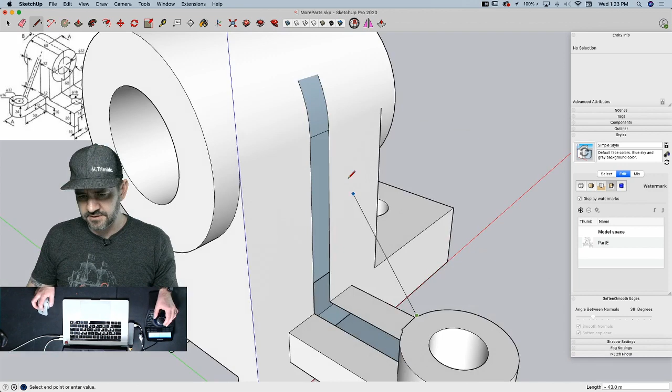There we go. And then I can just reconnect that and that. I'll need to clean up that as well.

Did that make more sense? I don't know, like I said, I'm making stuff up. I can make anything, make geometry in 3D. I just don't know how this would actually get made in the real world.

That's not your job as a designer. That's right, I don't have to worry about reality. The fabricator takes care of that. I don't know.

It's just water, don't worry. I'm in the middle of my work day and my boss could be watching at any time. In fact, he might chime in. He's on? No, I don't see him. No, he'd have to bite on that.

All right, cool. Yeah, so not 100% sure how that would actually work out, but I'm gonna grab that, make it a group. Let's just take a peek.

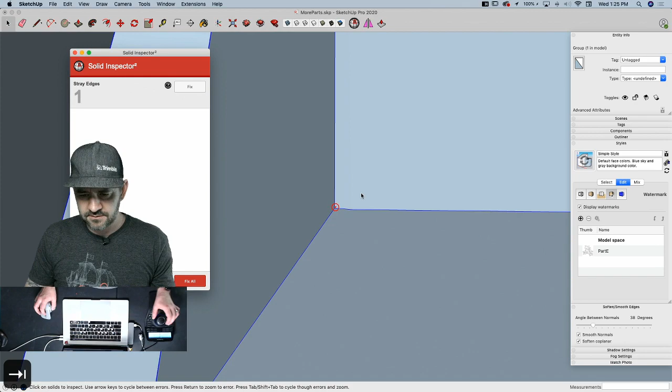Oh, something's not solid, there is a stray edge. Let's find it. Oh, I deleted this, I deleted one of these. This is where the arc broke. There he is, troublemaker. Oh, got it. All right, now it's a solid group. All right, looks good.

Woo, all right, so yes. I want to comment on this because Brent had posted a while ago his problem file on the forum. I downloaded it and I've been playing with it, and I don't know if I've necessarily fixed his problem at this point, but I just want to be clear for everybody, he's doing all his drawing on different tags or different layers instead of layer 0.

So I'm having to go through and explode everything and move everything to layer 0, then regroup it, and then move it back to its own layer. So make sure you're always doing all of your raw geometry on layer 0, or untagged in SketchUp 2020.

Right, and I will visually illustrate exactly what Jody just said. So over here in tags, you can use the layer word while describing this, since some people at home are not. Leave this pencil right here, leave the pencil on the top untagged. And then as you create these parts, once it goes into a group, then I can put it into a tag there. But your geometry should always stay untagged.

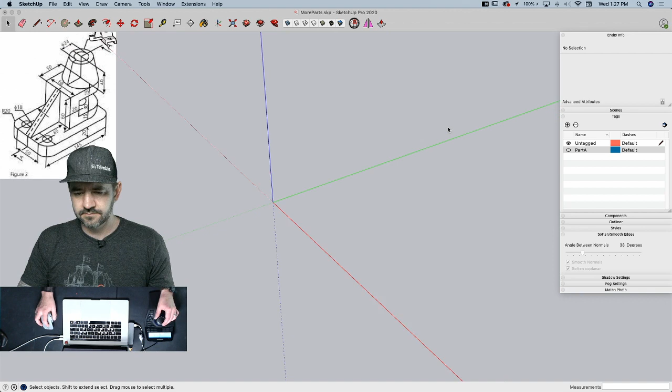All right, let's look at this. Ooh, what a nice rounded base, haven't had one of those yet. This one's fairly simple, pretty much start at the ground and work your way up. The challenge with this, we've got a little bit of a recess right here. Looks like this hole continues through the whole piece. And then we have like a cone shape up here.

So that'll be a fun one to put together. I'm not saying it sarcastically, it should actually be a good time. So we'll start with...

What is this dimension to? Is this the overall out-to-out dimension? And then here I have the dimension for the internal radius. I think that's what I got, you guys can correct me if you interpret this differently. I think what they're giving me is the overall dimension here, maybe. Now it kind of looks like the beginning of the arc. Is that supposed to be underneath to this point?

Oh, because it looks... All right, let me try something, we can always correct. So I'm going to say this one right here, I'm going to draw 50 by 145. I think if it was going to the center, that 50 you're seeing across the front would go center to center. So that 145 should go to... is this line supposed to be coming up to right here? And then what's going on back here then? I don't know.

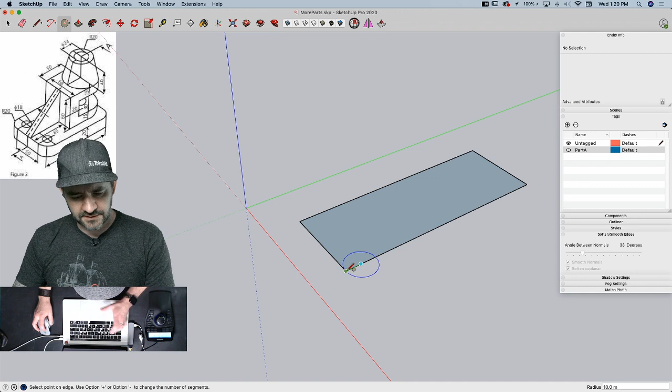Okay, so I'm going to assume full length. I'm going to bet you that 145 is the full length. I think so, I think that's what it is. And then if I come here, I'm going to come back 20 and draw a circle. No, this is a radius of 20. Oh, so that was right. So I'm going to draw a circle.

That gives me 50 from the middle of arc to middle of arc, and an overall length of 145.

Let's see what happens. All right, I'm going to go to the center point. I'm using the center point rather than the edge because there's no corner to pull off of. So I need to come back, according to this, 65 from this face back. Actually, I should probably pull this up into space.

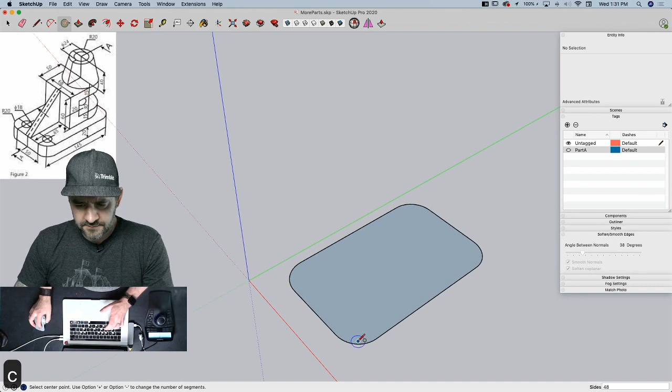Let me put my circles in. So I have what looks like two screw holes here, radius of 9. If I delete these first, then I can just pull this up 20 and be done.

If you ever have a situation where you have lots and lots of holes, a lot of times it's easier to put those holes in your flat surface and pull the whole thing up rather than push-pulling a bunch of circles down. So prepping your geometry on the flat is a lot of times easier than messing with your 3D geometry.

All right, so now from here I'm going to come back 65. I'm just going to put a line across like this right now. And now this shape is 68 wide, so that's 34. So I'm going to come this way, 34.

And then I'm going to go 50, and then come this way 68. Right, I come this way 68, and then this should be 50. All right, so there is that.

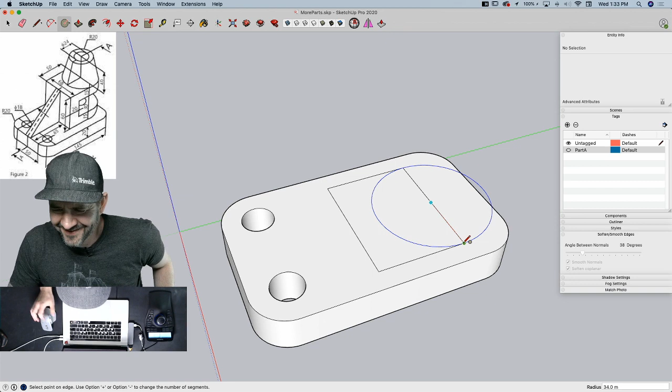Dave's already done this. Maybe we should just get Dave to walk you through it.

Looks like, oh yeah, Dave mentioned there was one bad dimension on here. And it's this 50, I assume. Yeah.

So if I did that, then this circle would come out to there, which would put it right on the edge.

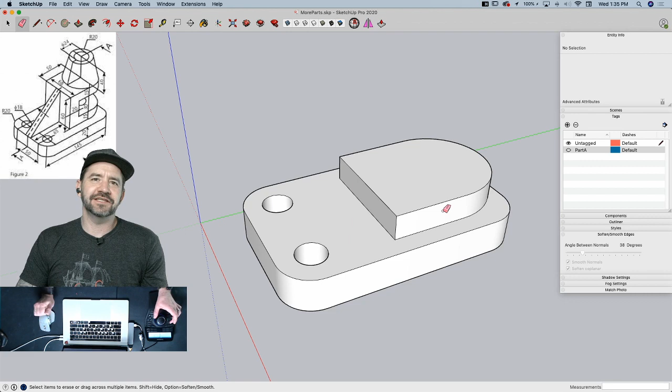Maybe I don't have context for this, as is the way of the Google, but it's possible that the text originally accompanying this drawing was 'find the incorrect dimension.' Somebody made a reference to Escher. Oh yeah, that could be Dave too, right off the bat said the dimension was bad, and then Steve said, 'Oh yeah, Escher part.' I'm gonna agree with that.

I'll take that up 30. I'm gonna grab this face right here. I'm going to copy it up to here and push that up 15. Pull that up to here. Delete some things.

We'll come back and maybe we'll make some more changes, talk about some modification options. All right, so I'm going to put my circle back in. I did get rid of it, but it's back.

And now it is here, I'm going to pull this up. So modifier, pull up to 40. This could all come back to that original 145 value.

Which is something that both Arvind and Technomotive have both commented, that line point is the middle of the arc, not the ultimate overall dimensions. That could fix us. So hold on, because what I'm doing now won't be lost work after we make that change.

So I'm going to grab these two faces and make them a separate group. And I'm going to come in here to this middle point. I'm going to draw a line, I'm going to draw a circle right here, radius of 20.

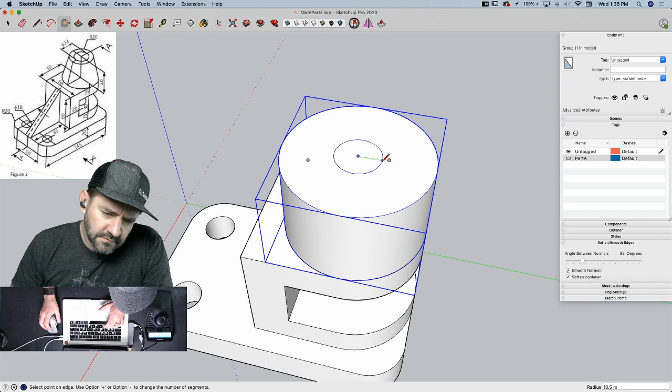I guess I didn't have to group that, but now I can grab this circle and scale it about the middle. So I hold down the modifier key, Option and Shift, to scale it to that circle. I didn't have to do that, I actually didn't have to do that in context. I just did it because I get scared about my faces joining together.

Now that I've done that, I can explode it again. I said I had a nightmare about my faces fusing together - that's a whole other thing. All right, before I push pull this, I'm going to grab it by the middle, modifier move.

Oops, wrong modifier. And drag it down on the vertical axis and drop it right onto that next surface. And now, why does it look so much smaller? I'll pull it down to this piece right here. I'm not going to go all the way through intentionally for just a second. To mess with the rest of the geometry, let's play with some, see if we can find the actual proper solution here.

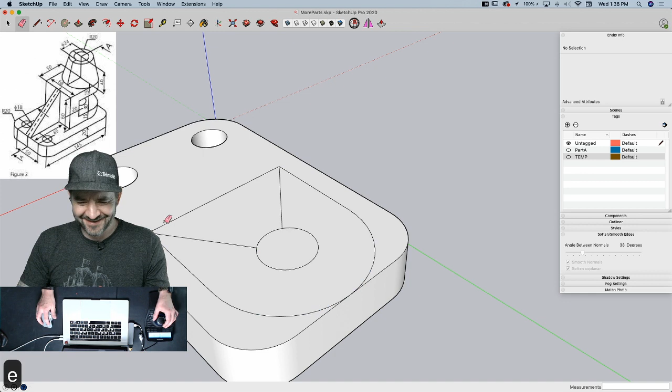I'm going to grab this stuff, make it into a group. I'm going to put it on a layer called temp real quick so I can just turn it off. What? A tag. Oh. Someday I'll have that all down, by the time we change it to something else.

All right, so I have it as two separate pieces because I want to keep the geometry separate while I do this. Because I know right now this right here is still 65. Now with this ungrouped geometry, I need some reference lines to make this a little bit easier. So I'm just going to drop a line straight down from the center. Oops, try it again. Easy for me to say and then not do. I'm just going to drop a line straight down there. I'm going to find this arc, drop a line straight down there too. This is not required. I could just find those inferencing points just as easily. This is just for my own reference.

So right now, center of arc to center of arc is 105. So this is saying that that piece is 40 bigger. So to do that, I'll grab this, move it this way 40. So now I can verify from here to here is 145. And between these two circles is still 50. And this one right here is still 65 from the end. Now we took 40 off of this thing.

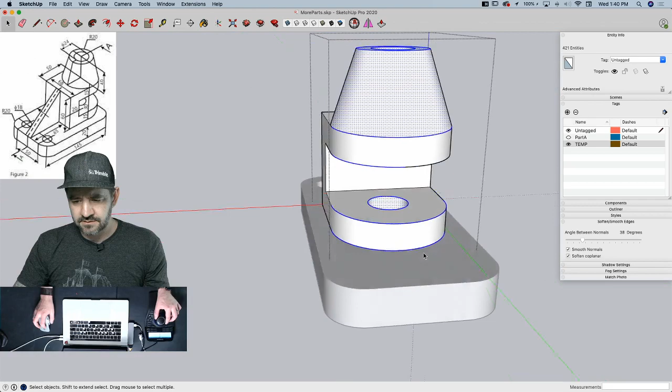So if I come in here now and grab all the geometry that was affected by that, it's going to be this piece right here, this arc, this circle, this arc, here, I'll just go like this. Other half of that arc, that circle there. I could grab that geometry right now and scoot it this way, 40. And that should give me a dimension from the center of this circle back to this line being 50 again. All right, so that's that. That still doesn't look right. This looks way too far.

Okay. I'm sorry if I say your name wrong. Josen on Facebook is saying that the 145 looks like it's at the tangents of the 20s. So this is another option. So if we look at this point right here, and this point right here, currently they are, oh boy, 173.37. I'm not doing that math.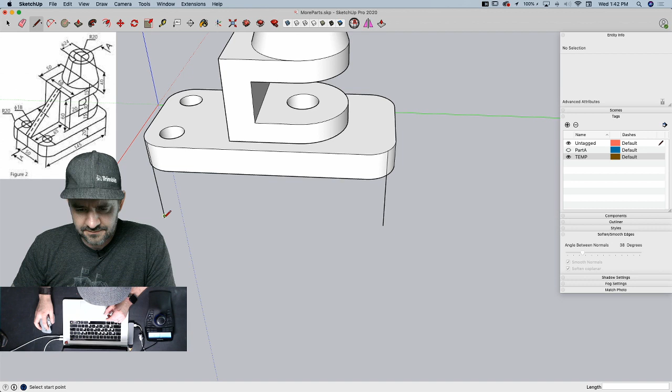Here's how I'm going to not do that math. I'm going to draw a line here and say 145. Now I can just grab this geometry, grab it by this handle right here, and move it right back. Whoops, I didn't grab everything. I missed that section right there. And grab all of that, slide it back to here. Ooh. Weird spot to pull a dimension from.

I'm sure it made sense to the guy that made the drawing. But, well, what does he know? I don't know. I don't know him. I don't know what he knows. Seriously. Yeah, if you were actually making this, I don't know how you would pull that dimension. Dimensioning arcs in real life is hard enough as it is. Yeah. All right.

So that was ridiculous, but that does seem to be the thing. Okay. Yeah. It looks like a drawing now. Whatever that's worth. All right. So obviously somebody should 3D print this and then verify with calipers that I got the middle of that arc 145 from the middle of that arc, please. I'm gonna 3D print this out after we're done here. There we go. We'll play with it. All right.

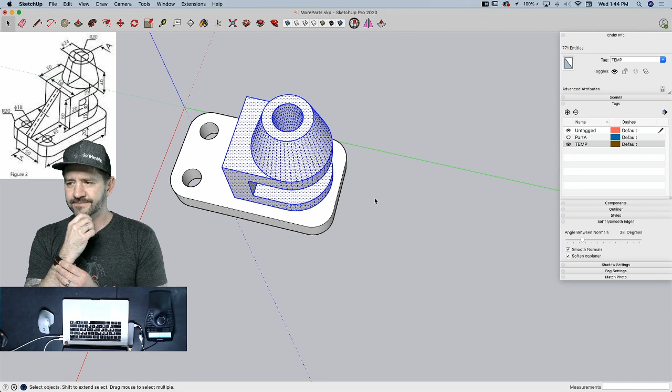Can you double check me on that? Feature request. Yeah, we play with it. I will say, so I agree. Dave just said that would be stupid, and I totally agree. But my drawing looks right. So let's do the quick confirmation.

Well, let me clean it up real quick. So I'm going to grab all this geometry, right click, intersect faces with selection, because I had some issues here. I had a hole here that didn't cut through. I can get rid of this line. Nope. I need to go inside and get that surface out. This hole right here has to be pulled all the way through to the bottom. Let's soften all that.

And then I'm pretty sure this didn't merge for some reason. And then I'll turn on X-ray. This is what somebody was talking about, is cleaning up. Edges are super easy to clean up in X-ray because you can just select them and delete them. Faces are a little bit more work because I can't select a face in back through the face. If I click, it's gonna always pick what's in front of me.

So if I want to select faces, then I do have to kind of pop my head inside the model, but then I can delete that. The same thing going on here. No, that's right. This is an extra face here. All right, so with that, I'm gonna go ahead and make that a group. I didn't get it all.

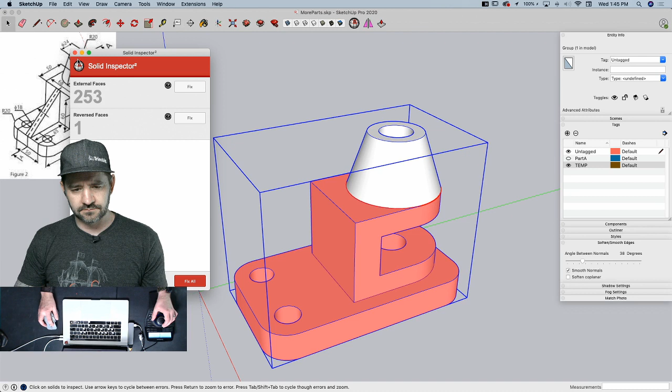I believe my problem is, whoa, there we go. All right. I got a surface border somewhere. Dang it, thought I deleted that. What? Wait, what? Oh, I deleted a face that I absolutely needed. Whoops.

All right. Here's my finding on circles. If you draw a circle and then you change the number of segments and then you close that document, but you still leave SketchUp open, then it will still remember whatever your value was in the next document window you open. So say you set it to 48, you close down your document window, open a new one, it's still 48. But as soon as you exit SketchUp, it defaults back to 24, even if we set it in your template. Okay. Good testing. That's on the fly.

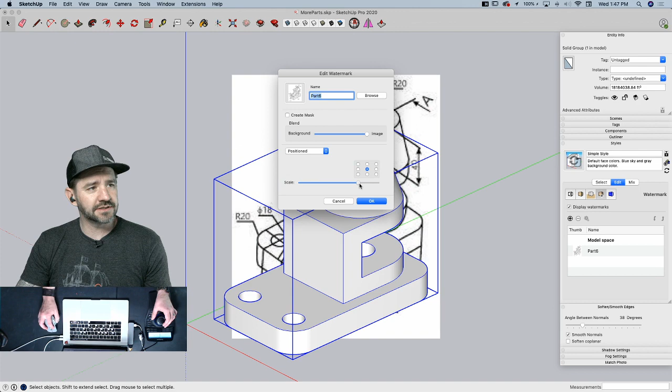All right, so this is now solid. Now let's check this. Let's go ahead and get into our parallel projection. For the sake of dramatic reveal, I'm going to come over here into my styles. I'm going to take this one and position it right in the middle. Make it nice and big. Yeah, it's a session setting, Andy. All right, and let's see if we can't line this thing up. Ooh.

You still going to work on that gusset? Are you doing this right now to draw that gusset? Oh yeah, gusset. No, I'm totally preoccupied by this geometry thing. You know, geometry is a kind of math. You're secretly a math nerd. Yeah, but I like shapes. So that's my excuse for being okay with geometry, is I've always enjoyed drawing things.

It still doesn't look right. Something still seems off about it. But I mean, this looks a lot closer. I'm not arguing that it's a ridiculous thing to dimension the 145 from an edge onto the radius of an arc. That's silly, but it kind of looks like that's what they want. So, meh. All right. So let me slap that gusset in here real quick.

Look at me, I came across this gusset like it's no big deal. I'm gonna throw the gusset in. Yeah, I know, right? Just watch this. Apparently, I'm doing it casually too.

If you go on Pinterest, remember Pinterest, man. There's like 8 billion different technical drawings out there. You can just go and grab stuff, download them, and print. Is that where you're getting them from? Pinterest? Yeah, these ones all came from Pinterest.

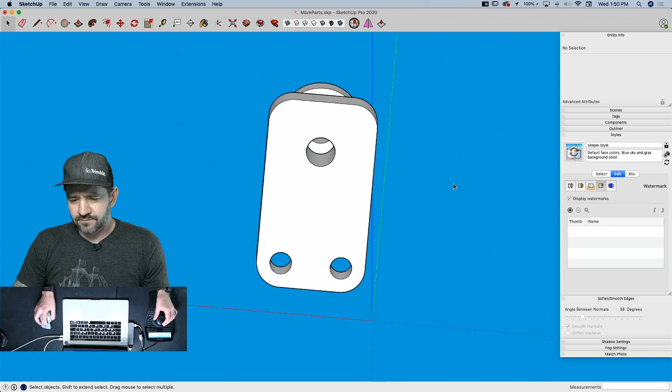That's weird. Yeah, this guy, that draftsman needs to lose his job. He needs to go back to, well, I don't know, being a lifeguard or something. You know, it is possible that these are scanned images of hand drawings from long enough ago that the person who drew this doesn't do this anymore. That is totally possible. So it may have happened because he retired after working for 40, 50 years at this job.

But it also says figure 2 on that drawing. That's why I started looking to see if maybe there was a figure 1 that was a different angle. Hey, if you can find the accurate drawing by searching Pinterest for figure 1, you should be a PI. That would be a very lucrative job as a PI. Google image search.

Awesome. Yeah. Well, that's 6 of 6. Honestly, after we did 4 last time, I was like, well, we won't get to all these, but I'll put them out there as stretch goals. But it happened. Oops, gotta come back to the origin, my friends. That sure is 6 parts. Yeah, so I was gonna go check. Marconi has more parts.

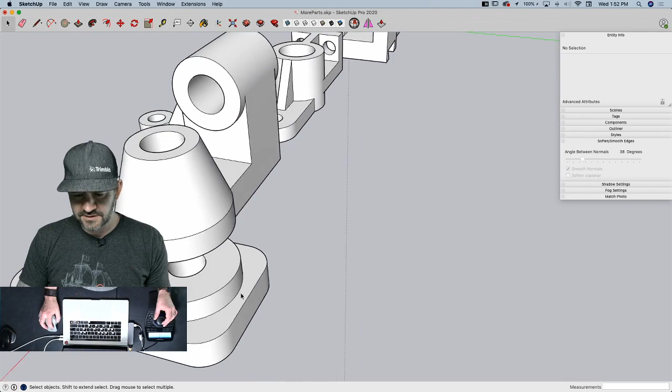So Dave made a modification. He stretched out this section right here to be longer. So he added to this dimension so that this came out. Does yours actually touch, Dave? Does this come out and actually meet right there? Because that bothers my sense of aesthetics. I feel like that needs to be just a lip on here. I don't know why I feel that's necessary, but well, that was fun. It was nice to have a problem to work on.

Well, that's one of the things that makes SketchUp cool to me, you can putter around and try and solve the problem that arose in that drawing by being able to play in 3D space like that. Well, it's cool because, and I like this about 3D modeling in general, we were able to come up with different scenarios. Look at this, we reworked this 3 different ways before we finally had what we wanted to use. And all of that was done for no expense, no material wasted, no time.

I mean, to go in and create 3 different alternatives and grind this down in 3 different ways, I don't know why anybody would even do that. But 3D space lets you actually go in and play with that. And like I said, I think that's why I've always enjoyed 3D modeling, because you can go in and you can make anything. It's fun.

This has really inspired me. I think I'm going to go watch The Machinist again. Ooh, I can't do that. Oh, that was creepy. Batman at his lowest. At his lightest, for sure. Oh yeah, if you haven't seen The Machinist, you should go watch it. It was not my favorite movie.

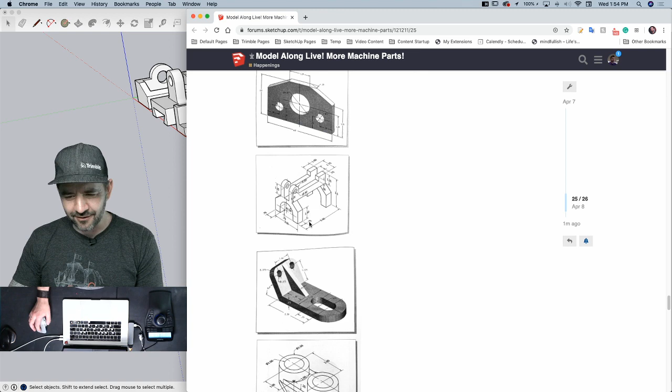I think I just found my favorite technical drawing. Just a minute, I'm going to put this up there. You can model it. This will be extra credit. Okay, bonus time, guys. Ah, too many pictures in here, I can't get to the bottom of the page. You know, there's a little bar right here. Shh. Ooh, look at this, that's fun. Holy cow! Looks like we got all of quarantine time nailed right now. Thanks, Marconi. Whew, awesome.

So you guys, if you are watching and you've got a little extra time on your plate, spend half an hour a day even. Grab one of these drawings from right here and go make it. I promise you, this will take your SketchUp skills to the next level. You'll get faster. You'll be more confident. Yeah, this is awesome. So many cool drawings.

So in the Pinterest link that I shared, there's a bunch in there that'll give you 2 or 3 different pictures, which are great if you're new to this. You've got multiple dimensions, and they literally look like draft drawings.

Oh, it's funny. I'm seeing now that they're inside their own pinboard called SketchUp Rendered. So somebody, whoever this person is, drew all these and put them all up in SketchUp. So they're totally SketchUp-able. That's awesome. All right, yeah, let's throw this thing in real quick, and then we'll call it.

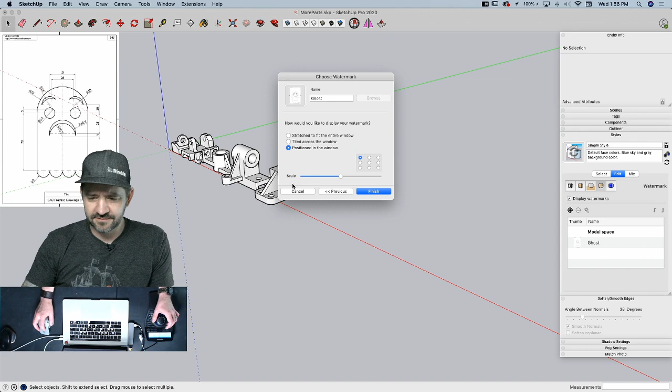I'll do the same thing. I was tempted to trace this, but no, let's pull it in just like we did and just draw it from the dimensions rather than... stick this up here again. Oh, that's gonna be rough. Keeping it big enough to... All right, here's what we'll do. Put it down here.

It's funny that you think that it matters which corner it's in. Well, I was just trying to get out. My head's in the way, not for you. Oh, Jody. Okay. It's time to think about everybody else, okay? Wait, everybody else. There's other people? The rest of them. Oh, that's what I thought these were just my virtual voices.

So I'm going to start with his dome right here. His head is half a circle and has a radius of 32. So I'm going to come in with a circle, draw it across here, 32. There we go. And now from that center point, if I come across my red, I can take a line down 70, come across this way. Well, this will be 64. And I can take that straight back up. So that gives me the initial shape.

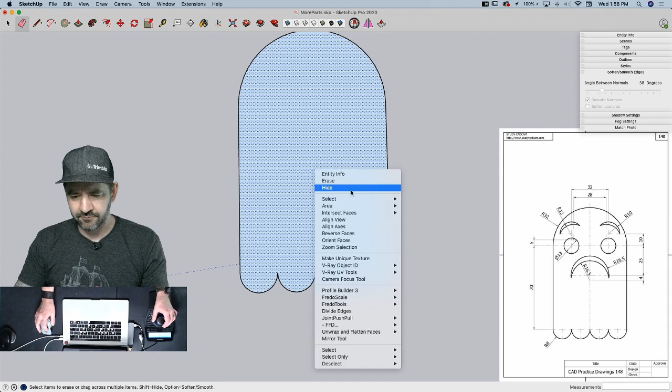Down here, I have 4 half circles with a radius of 8. I'm going to go ahead and grab an arc. I haven't used arcs at all. Come this way. It's radius of 8, so the half circle will be 16. And then I can pull it out to 8. And I can just grab that. Option, 3x. All right. Let me reverse my face. All right, now what we got is a bunch of overlapping circles.

This is fun. So everything is based off of this center dimension, it looks like. I'm gonna draw a line like that, and then I'm gonna come down 25. And then I'm going to come down 4. This is actually where I should probably be using guides right now. I'm going to draw a circle from here with the radius of 16.5, and then from the lower point, another one at, oops, stay on axes, 16.5. There we go. And then I can just use my eraser to get rid of those extra lines, and I have a ghost mouth.

All right. From there, we come up 10. And then we have one at 14, and one at 16. Actually, come here 2. And then same thing, 2 radiuses of 10, so circle here, 10, enter, circle here. Huh, something's not right there. Oh, that one's supposed to be off of 5. So hold up.

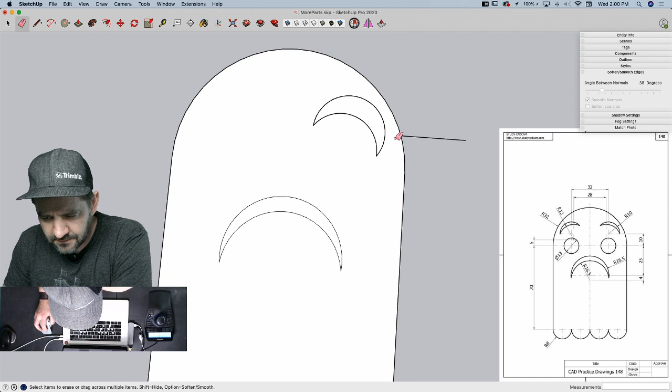There we go. So I have a circle here of 10, and a circle here of 10. Really? That doesn't look right. But let me verify my dimensions. If I hover over, I can get to the center point. And now I can say, okay, to the middle, this should be half of 28, so this should be 14. It's 15, oops, hold on axes. It's 14.

And this should be 5 feet from this point. And the arc for this one should be 16 feet over and 10 feet. I think you're going too high for the center points on those two. The centers are 5 above this. The center for the eyebrows is 6.5 above the center for the eyes, it looks like. Right, and if the eyes are centered on this 70-foot measurement right here. No, they're lower, aren't they? No, because look, 70 is this line across. Yep. Okay. Now, let me get my eyes in. Maybe that'll help a teeny bit. The eyes have it.

So the eyes are right here because they're off of this 32. And these are 13. Oh, nope, they are not. They are 6.5. Somebody's lying. You know, it looks like this one. Oh, this is a 13. This is a totally different radius. That 13 is the eye. The 10 is one of the eyebrows, and this is 13 right here. That's why. Because you got to read the drawings. It's interesting. It says 13, and then off this it says it in two spots.

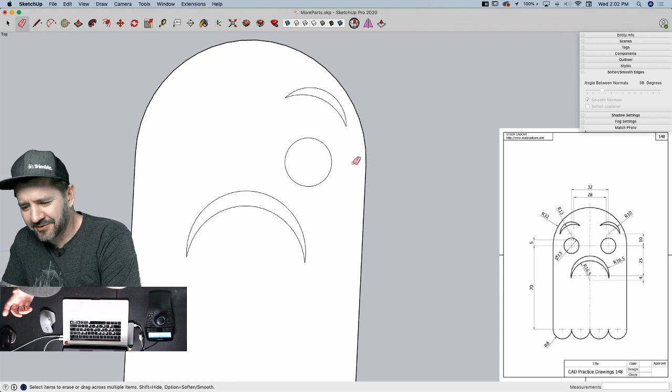What's the O with a line through it thing mean? That is diameter as opposed to radius. So why is it giving a 13 diameter there, but then another one that has the 13 radius? The inside arc. So this is 13. Oh, okay, okay. The outside is 10. That's why I was so far off. Whew.

Oh, boy. All right, so I'm going to come in here, grab this center point, flip that over. Wow. I thought it would be a lot quicker and easier than it was, I'll be honest. I know, right? It's a ghost. It's a cartoon ghost. Should totally be easy. There we go. And because we're doing this, I'm going to go ahead and give him some depth because we're machining. There we go.

Ooh, that was spooky. Just floating around like that. The ghost of live streams past. You need to remodel the Cobra. I don't know if we need to go back to the Cobra anytime soon. I know. It's a pride thing. I got to let it go. Okay. Although what was that movie, that Ferrari versus... what the heck was it? Ford versus Ferrari or something like that. So watch that movie and then go back in and remodel the Cobra. Yeah, maybe so. We'll see. I'm still blaming it on coronavirus. That didn't go well, and it's COVID's fault. Yeah, I would be in support of modeling a Shelby instead of a Cobra. Who's Shelby? Shelby is the Ford in the Ford versus Ferrari. They're not racing a Cobra; they're racing a Shelby. Dave actually called me on that. Anyway. Shelby.

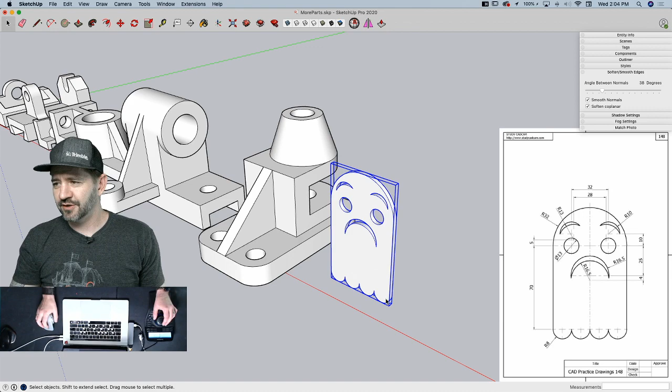Awesome. Well, hey, that worked. Good bonus piece there. Yeah, you didn't just smash it out as quick as I was afraid you might. It was slightly trickier. Yeah, it turns out you have to actually read every number. They're there for a reason.

That's right. Lawrence said if you try and build the Cobra again, he's going to bite you. He will, or the Cobra will bite me. Oh. Is that a threat or a pun? It's a pun. It already bit you once. It did, and oh man, gotta get under there. Gotta take care of that. Yeah, I have limited lighting options here, I'll be honest, but most times it looks pretty good. One of my problems is I have a light in my garage that won't stay off. It's got a sensor on it, so it keeps turning on even though I want it to turn off. I think that's what's casting that shadow behind me. You know, people have these problems in their garages all the time.